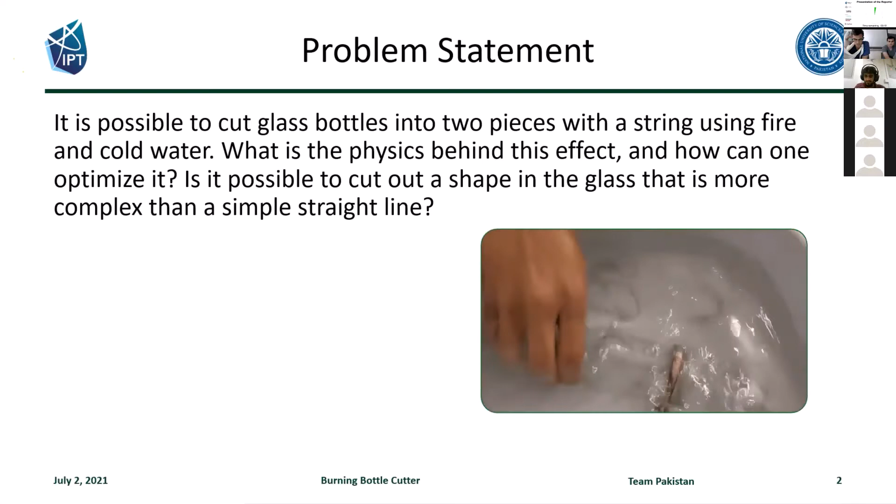Okay, so this is Mohammad Qasim from Team Pakistan, and I'd be presenting the problem burning bottle cutter. So this is our problem statement, and I believe that the host has read it. I'll just show you this GIF over here, and then I'll move to our interpretation of the problem. Okay, fine. So our interpretation was to first explain the phenomena, then optimize the procedure, and then the possible design variations.

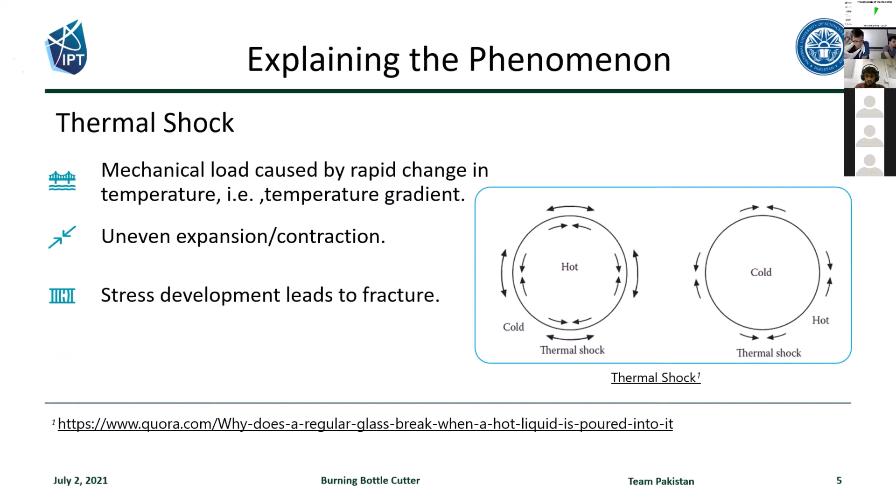So coming to explaining the phenomena, we had to look into two things: the thermal shock and properties of glass. So what is thermal shock? It is the mechanical load caused by rapid change in temperature, that is temperature gradient. What this does is that it causes uneven expansion and contractions in a medium, and this develops stress that leads to a fracture. This is the picture from our source. You can see.

So coming to the fracture conditions, the fracture condition should be that the tensile strength should be much lesser than the stress induced, and stress is directly proportional to the Young's modulus and the coefficient of thermal expansion. If you look at this equation, the stress is also directly proportional to the temperature difference. The only variable here is the temperature difference, and other parameters are constants and dependent upon the material. And so most of our work was around the single variable.

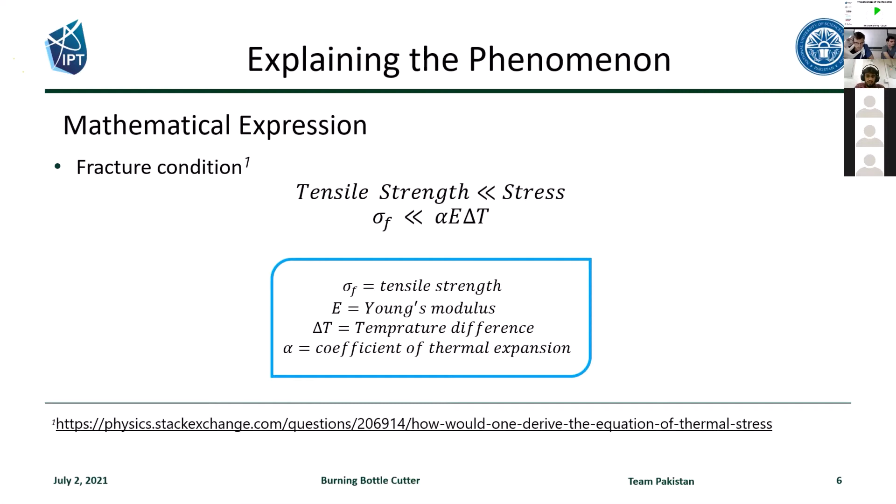So coming to properties of glass, glass is a poor thermal conductor. It has non-uniform transfer of heat, and expansion in it occurs non-linearly, and basically that is why we get the fracture. So coming to the specific properties of glass, glass has low tensile strength, high elastic modulus. It has relatively high coefficient of linear thermal expansion, and minor temperature difference can lead to fracture. So if you recall, these properties are in accordance with the fracture condition, and so this makes glass an adequate material to get the fracture due to the thermal shock.

Now, if you look at this diagram, which is labeled compressive, this is our case. The TP is the surface temperature and TZ is the core temperature. We light the surface, so the surface temperature rises and becomes hotter than the core temperature. And this produces this delta T, the temperature difference. And when we put the whole system into water, the temperature difference is exaggerated, and thus this leads to the fracture due to thermal shock.

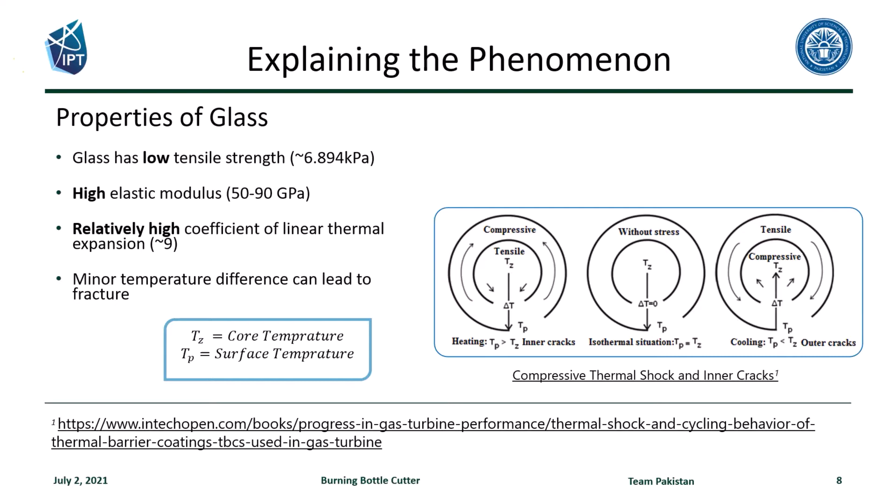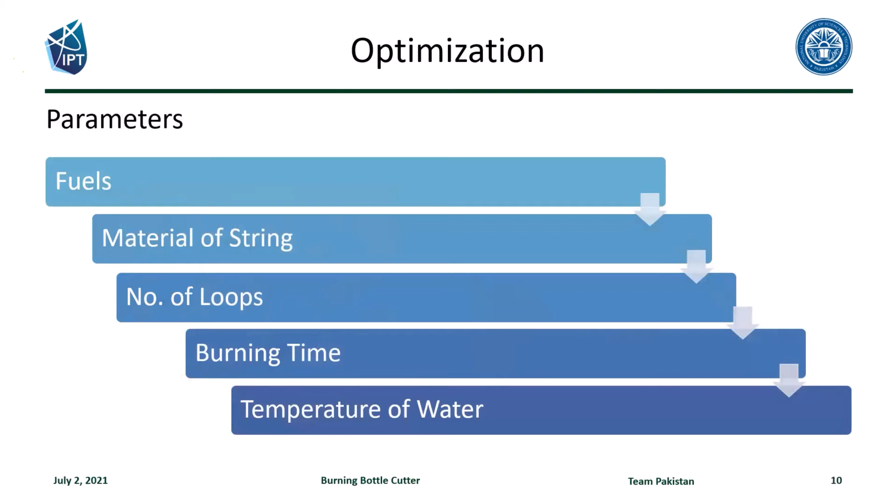So coming to optimization parameters, we had fuels, material of string, number of loops, burning time, and temperature of water. So the two fuels we used were acetone and methanol. You can see the temperature difference between them and the burning time and the orientation. What we mean by angle here is that the flame of acetone was too low and the temperature too was too low. So we had to incline the bottle so that the heat could be localized, so we could get a cut.

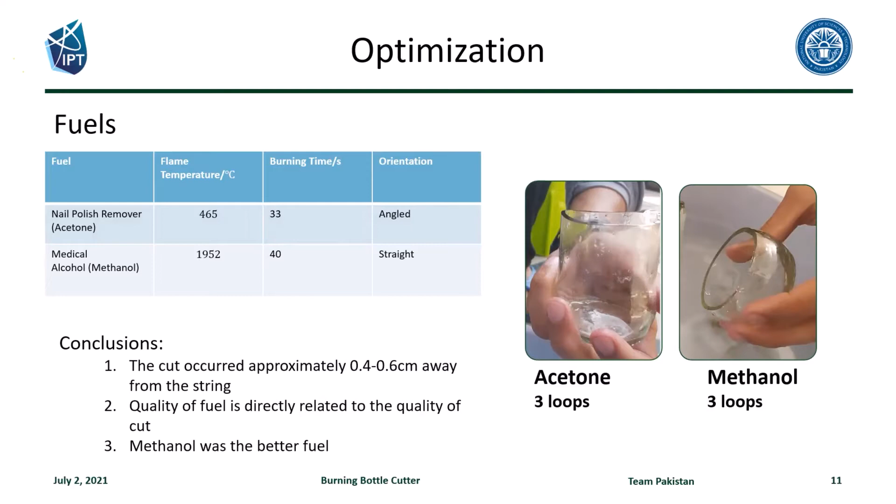But this was not the case with methanol because the flame was well enough spread, and the temperature too was good enough to give us a cut on both sides. So conclusion: the cut occurred approximately 0.4 to 0.6 centimeter away from the string. Quality of fuel is directly related to the quality of cut, and methanol was the better fuel.

Material of string: we used 5 materials, each of 60 centimeter length. To check the fuel absorbed by each material, we immersed the strings in fuel for 1 minute, then pulled out the string, squeezed it into a dry and empty container, and measured the squeezed alcohol to get the absorbed fuel. For observation, we observed the flame it produced and whether the cut was given

or not. Three strings gave a cut. With the cotton cloth, the cut was rough. With the thick cotton string, the cut was smooth. And with the fiber rope, the cut was the smoothest. But since we had a limited amount of fiber rope, the further experiments we conducted were with the thick cotton string.

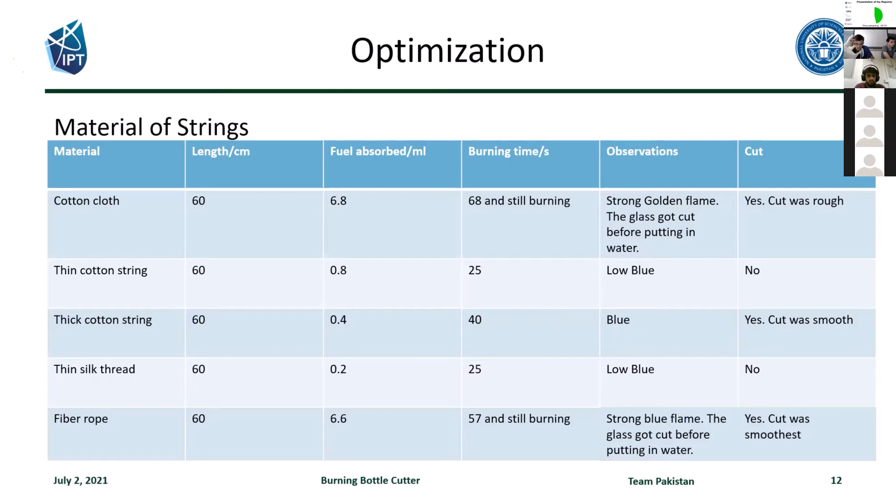Okay, so this optimization is dependent upon the material of string. For the fiber rope or the cotton cloth, only one loop would have been more than enough to get the bottle cut. But since our material didn't have, sorry, I skipped. This is the conclusion for the material of strings. The quality of flame is dependent upon the material of string, and the absorption is directly related to the burning time. So keep that in note.

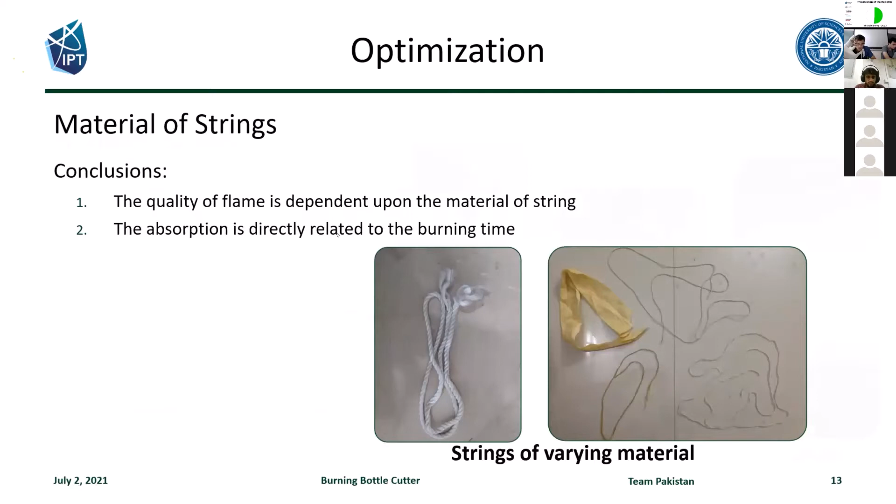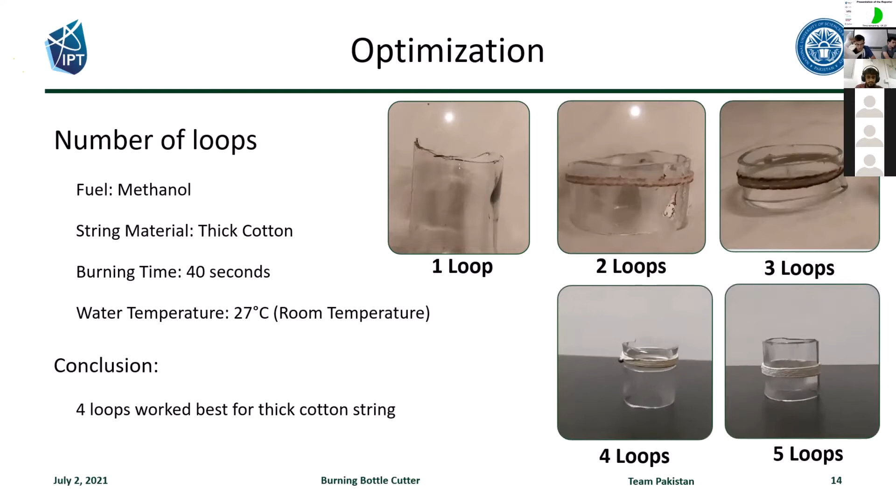Okay, so number of loops. The number of loops is dependent upon the material of the string. For the cotton cloth or the fiber, one loop would have been more than enough to get the bottle cut. But since our chosen thread didn't have that good an absorption, we had to get an optimum number of loops so that we could get a good cut. Here you can see the pictures for 1, 2, 3, 4, and 5 loops. In conclusion, 4 loops work best for the thick cotton string. Again, this is dependent upon the type of material.

Coming to water temperature, we used the already cut bottles for this experiment. The water temperature was varied, the burning time was kept constant at 30 seconds, and the type of string and number of loops were also kept constant. For the observation, the reused bottle didn't cut at the burning time which did cut the unused bottles. The glass merely cracked over 10 degrees Celsius. We got a crack at 3 and 5 degrees Celsius, and the bottle broke upon a mild hit. At 10 degrees Celsius, we got the bottle cracked. And at 15 and 20 degrees Celsius, we barely got the bottle even cracked.

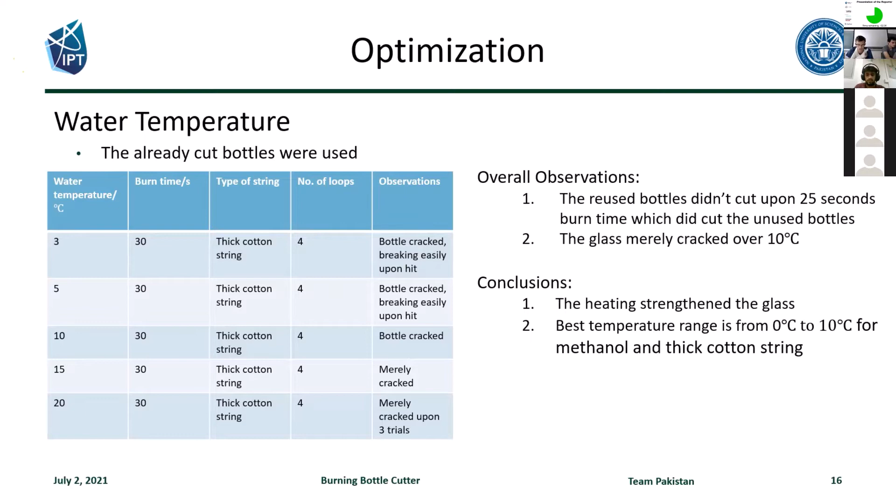So in conclusion, the heating strengthened the bottle, because the bottles weren't getting cut in conditions which would usually cut the unused bottles. And this isn't something new, to be honest. There is glass tempering, tempered glass, and thermal strengthening of glass. So it's only natural that the heat did strengthen the glass in those bottles. And the best temperature range for methanol and the thick cotton was from 0 to 10 degrees Celsius.

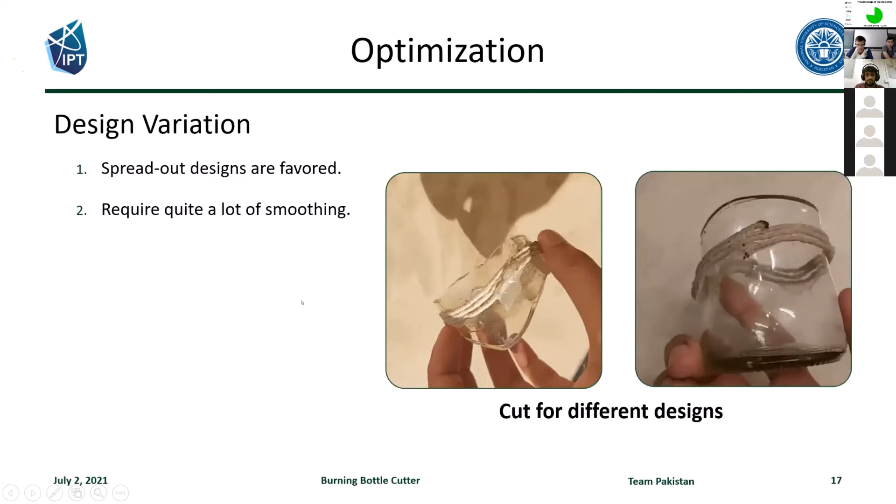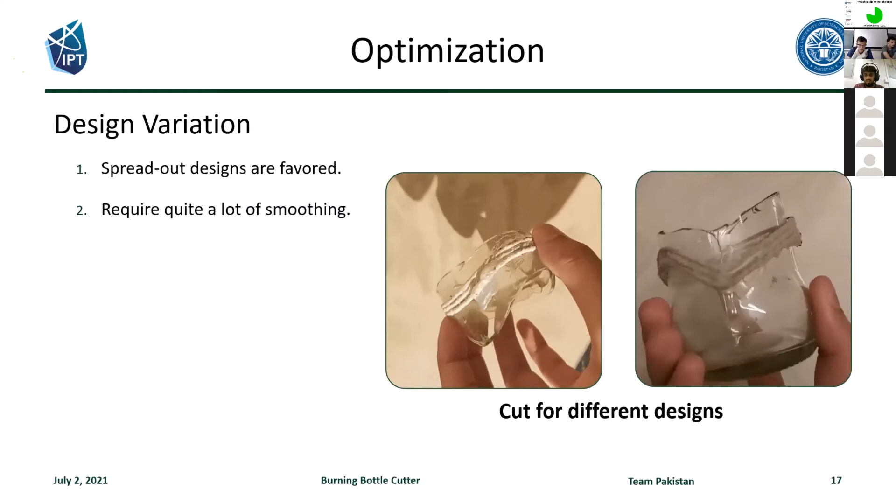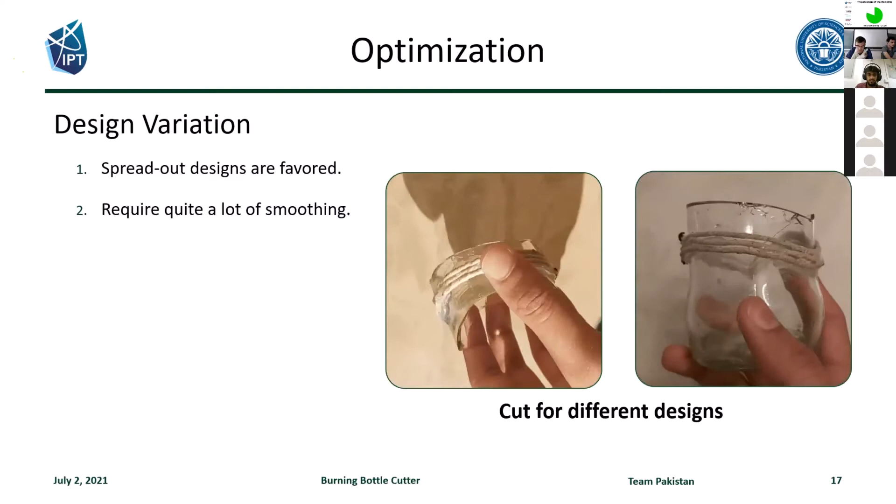For design variations, the spread out designs are favored. As you can see in the pictures, the crests and troughs in these designs are quite spread out. It could have been a square wave or a triangle wave, but then the heat would have been too low, and we wouldn't have gotten a cut in accordance with our string design. As long as the design was spread out, we did get the cut according to our design. But again, it required a lot of smoothing, and it was basically a rough cut. So in conclusion, the best bottle cutter would be one which provided targeted heating.

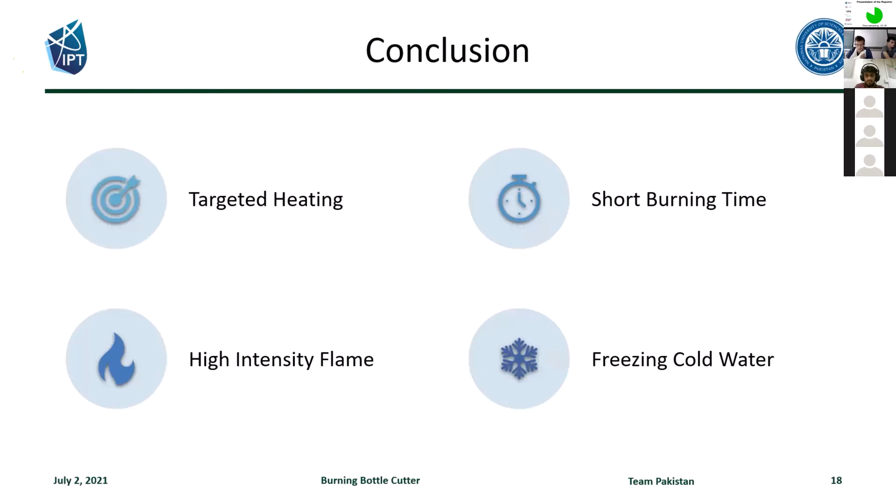It had a short burning time, it had high intensity flame, and it had freezing cold water. Okay, our limitations: we had limited variety of fuels. We did have the possibility of petrol, but it was too dangerous. And then we had the possibility of the lighter fluid, but we couldn't get it out of the container because the container was pressurized, and the container basically exploded twice. So we were only limited to 2 types of fuel.

We also had a limited variety of strings. We only used 5 strings. There was also a limited variety of the thickness of glass, because most glass we could find in our local markets was mostly of the same thickness. So that too was a limitation on our end. And there was also no means to measure the temperature of the flame. So that was a big hurdle for us.

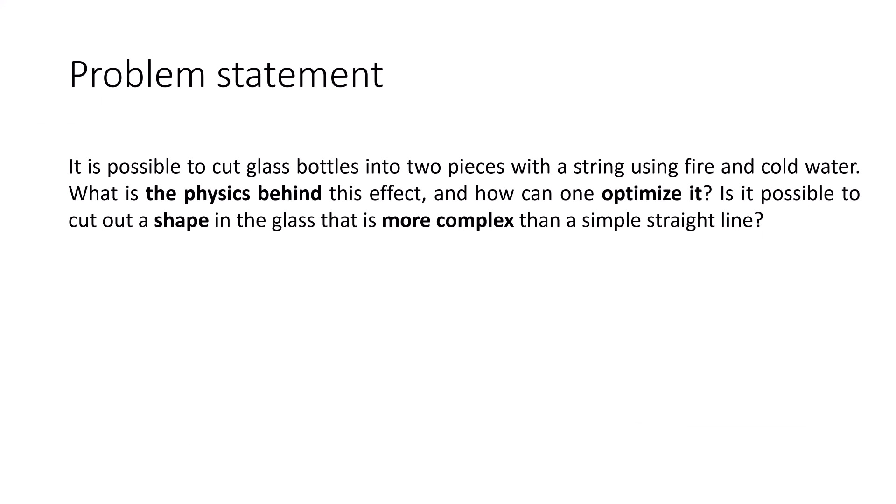So here is our opposition. The problem statement states that it is possible to cut glass bottles into 2 pieces with a string using fire and cold water, and asks what is the physics behind this effect and how one can optimize it, and is it possible to cut a shape in a glass that's more complex than a simple straight line.

So the presenter presented a simple theoretical model of the phenomenon. He mentioned the thermal shock needed, the uneven expansions in the glass, and the conditions needed for the fracture. He did mention some properties of the glass.

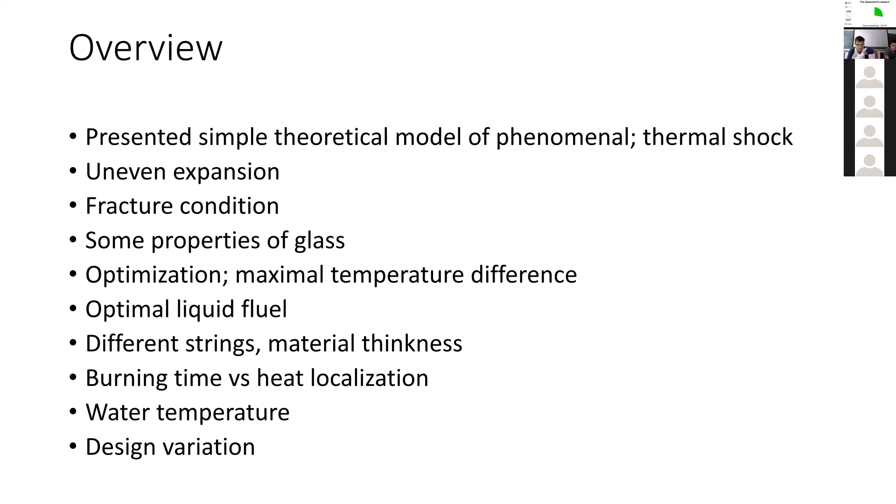Then he used a lot of optimization parameters, like maximal temperature difference, different liquid fuels, different strings, different number of loops, material thickness, burning time, heat localization. He did mention water temperature and some design variation. Okay,

so key points of the problem were to propose the physics behind this phenomenon. So the presenter mentioned the thermal expansion, that is the key point of the physics of this phenomenon, and of course also the low thermal conductivity of glass, and presented some properties of the glass.

However, he did not really quantify the glass he was using for his experiments, like the density of the glass, molecular structure, and the type of glass. And in the video there was a flame only on one small side of the whole perimeter of the glass, and we are concerned whether the temperature is the same on the whole perimeter.

Then about the optimization of the process, he used a lot of parameters and tried to optimize them, like maximum temperature difference, different fuels, material strings, number of loops, and water temperature. We are wondering about the scaling and the size of the bottle, which parameters he did not use, and also the imperfections of glass, like cracks, bubbles, or something like that, which could be important in the cracking of the glass. And also another parameter he did not mention is the thickness of the glass he used.

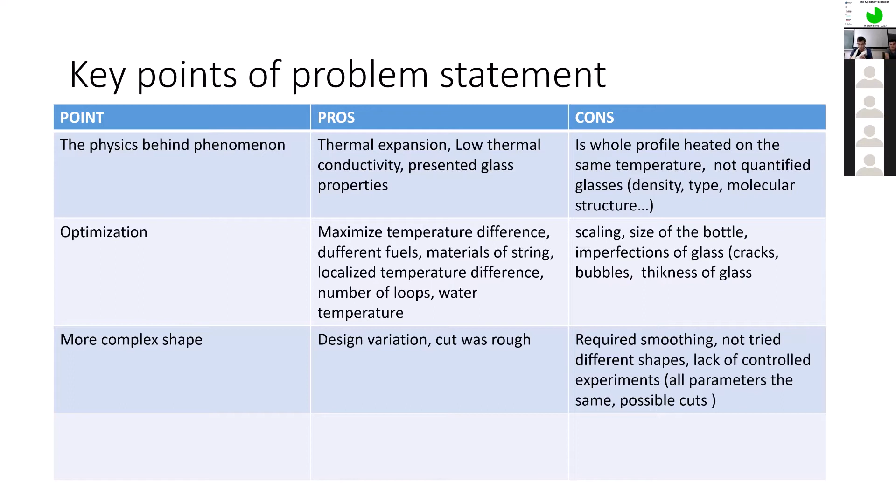Then he proposed a design variation to cut a more complex shape out of glass. Although he did manage to cut a shape that wasn't a straight line, the cut was relatively rough and it required smoothing. And he did not try different shapes. He did try this wavy shape, but otherwise his experiments lacked some control, and the parameters could be more strictly presented. Okay,

so in discussion, I would like to discuss different types of glasses and different glass parameters like thickness, molecular composition, and type, and how these parameters affect the cracking of the glass. We are concerned about some additional cracking before heating, which could be beneficial in this more complex structure, and what could be the biggest curvature in theory, and how could this be approximated?

First, to go through the types of glasses. I did mention this in our limitations, that we didn't have that variety of glasses. So basically what happened was that the glasses we found that were thick weren't of the same design or of the same radius, and to conduct experiments we need to keep all the other parameters constant and only one thing needed to be varied, right? So if we did go for different types of glasses, they wouldn't have the same design. The bottles that we found of the same design were of the same thickness, and that is one of the limitations here, that we couldn't go for the types of glasses.

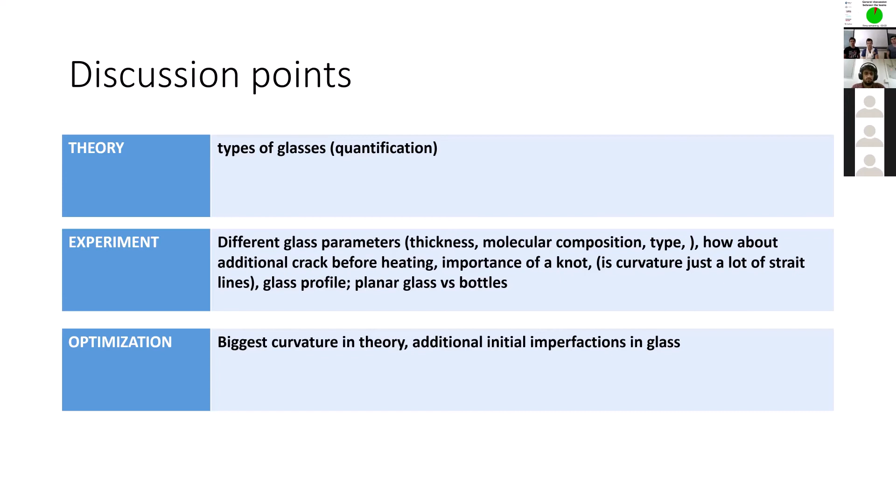But the sine wave doesn't have any edges of that sort. And if we get a good flame and the heat could be localized, we could get a smooth sine wave out of it. Okay.

May I start with a question to the reporter? You proposed at the beginning of your presentation a lot of different explanations of the phenomenon, but no experimental verification of these theoretical approaches. So, did you do anything to verify that your theory conforms to your experiment?

And if not, can you give me an example of an experiment you can conduct to verify the theory you have about the explanation of the phenomenon and the experiment in question?

So when we put the whole thing in water, that temperature difference exaggerates due to the temperature of the water. So the colder the water, the greater the exaggeration, and due to this temperature difference, we get the fracture. So basically, this was the whole phenomenon. Yeah, that's the whole phenomenon, but that's a qualitative approach. I want a quantitative approach. How can you, with data, prove that what you're saying right now is true?